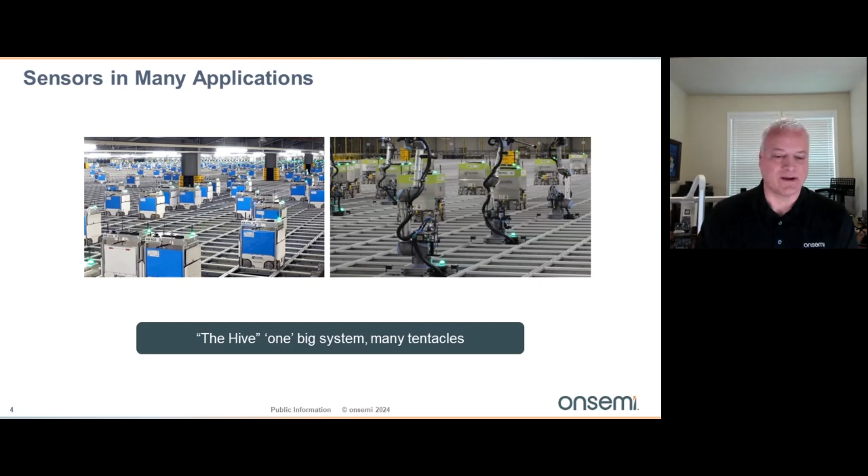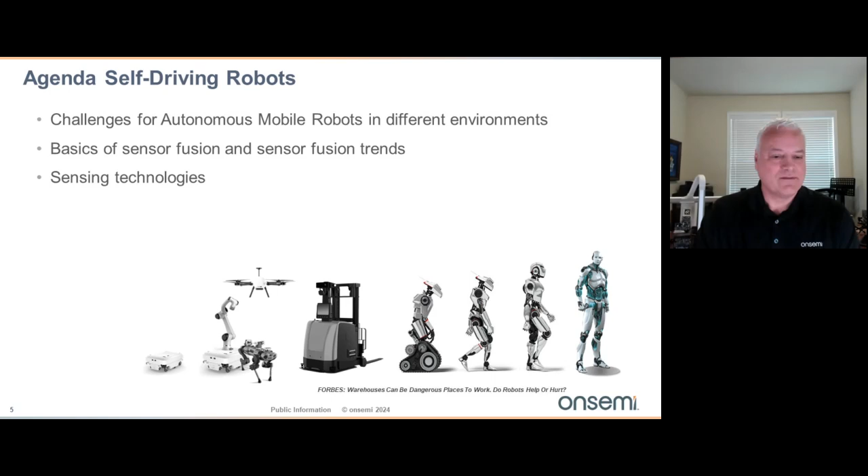So when we eventually create this wonderful humanoid, do I really need any other smart equipment around it? Because companies today already have humanoids drive the car, humanoids drive the not-smart forklift, and also have humanoids do other things. So there's this two-way approach where we have dedicated equipment, dedicated machinery that we're making autonomous, and then this activity to create a general smart humanoid that can take on many of these tasks.

That would lead to probably more standardization, because the location where you can place the sensors would be very similar in all these systems - they would all go to a specific place. So there could definitely be good gains on safety and standards made by going this route.

Of course, there's a lot of social implications as well, and on one level it's also labor replacement. But there's also many examples, like the dog you see here - things people come up with that make you go, do I really want my furry companion walked around by a humanoid? That relationship - he might love the humanoid more than he does you in the end. So that's kind of weird solutions.

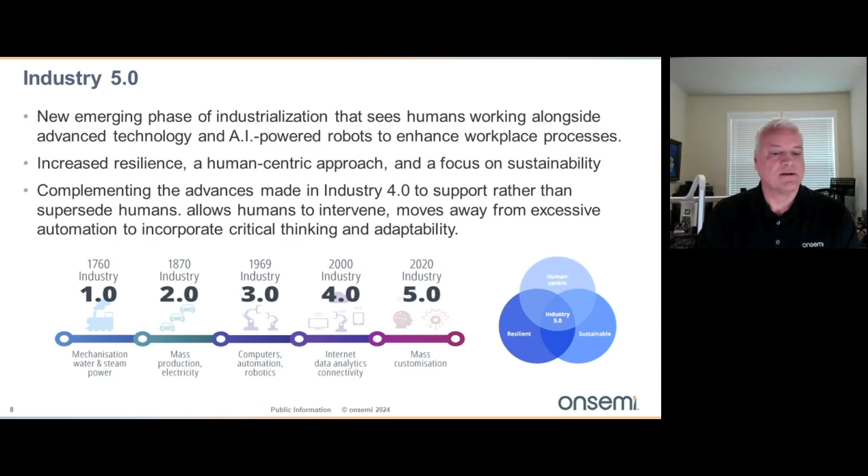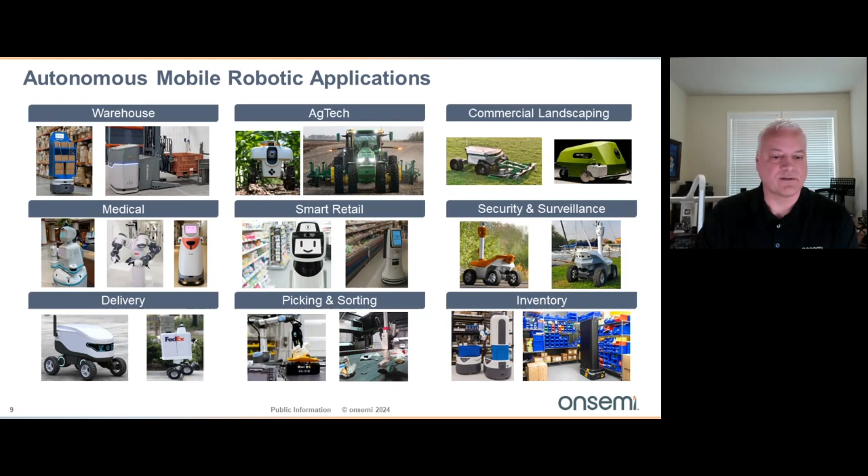It can be all over the place, and so these things are not standardized. Many of them - everybody is making their own solutions. And it's converging though with algorithms and the software side of things, with robot operating systems, etc., that these things get some functions that are inherently required for each of these platforms to move safely around the environment. So we saw our customers make many of these sensor systems as well as robotic solutions.

And we decided it should be fun, as we deliver many of these solutions, to create our own robotic platform. And that's this autonomous mobile robot you see here that we use as a demonstrator at trade shows, and also as a solution integration for different sensors and battery operated power solutions as well. In this webinar, I'm going to focus on the image sensors and LiDAR, as well as ultrasonic, inductive positioning, and Bluetooth solutions. So the sensors more - there's other presentations we have that focus more on the power side of things, and other lighting, etc.

So we started, for many years, delivering sensors to traditional industrial robotics after the robots got out of their cages and were used more in industrial settings. They either have sensors on them to be safe around people, so if people approach they can slow down or stop, or have sensors in the environment that detect people and can slow them down.

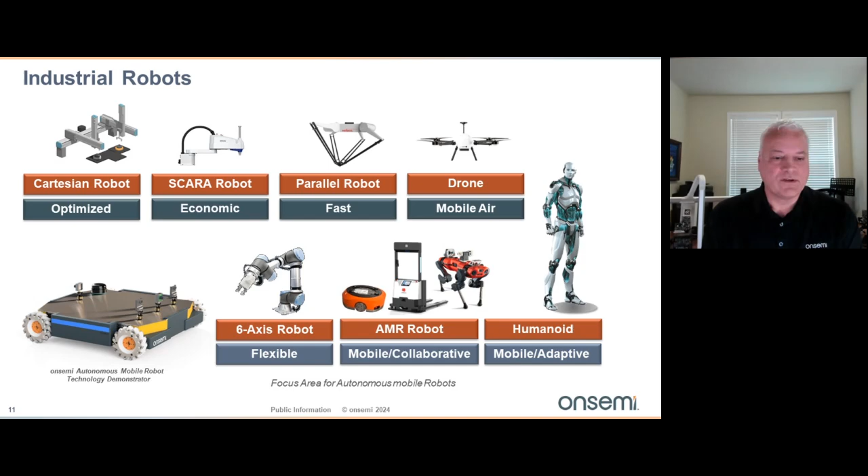This now goes from collaborative solutions to what we call adaptive solutions. And there's our friend again that looms on the right side. So this move from collaborative robotics to adaptive robotics characterizes itself by doing tasks with intrinsic safety and performance without compromise. You see a lot of medical solutions coming, elderly care, very fine motor tasks that these robots can do with their end effectors, and also very generic things like housekeeping chores or operating other machines in general.

One of the things that held robotics back a little bit was, how do you instruct these robots what to do? There were, of course, inroads made with these robotic arms to use waypoints, so you can move the robot and program it that way, so you don't have to actually program something.

But now with the advancements of, of course, large language models, you can instruct it what to do and have it have a really good interaction with these systems to have them do what you want at certain times. They are also more capable of performing tasks that traditional robots were not able to do. You saw every week there's a video with robots dancing and jumping and doing things we couldn't believe they could do before. So that's very interesting and encouraging.

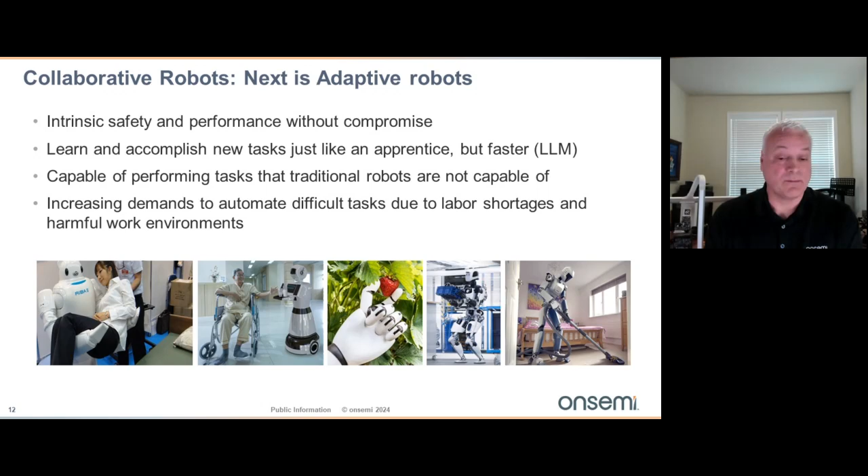And then the increasing demand for automation due to difficult tasks or labor shortage is something that is a continuing path that we're on with all this automation.

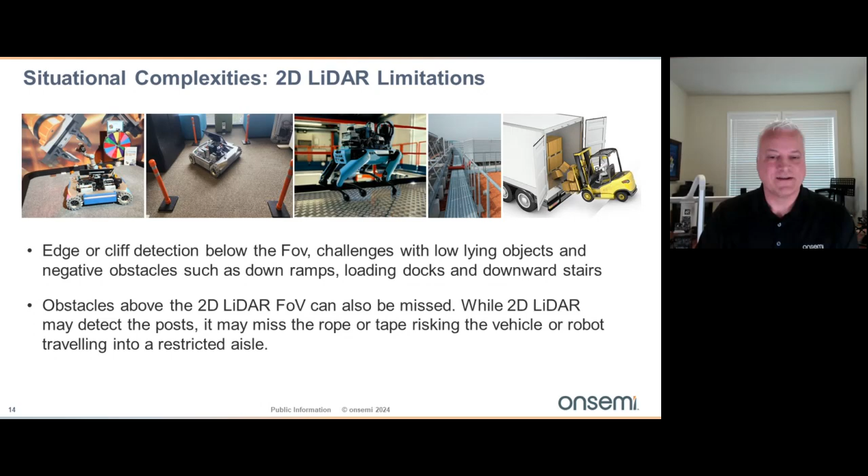Apparently, robotic systems are more challenged with liquids in general. This applies for industrial settings as well, and they need to have special training on that.

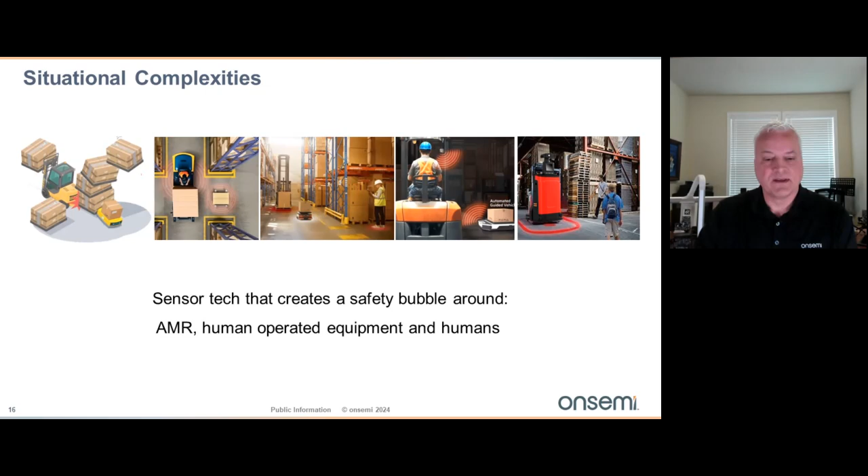So many different things can happen with these systems. The best practice is to control the environment, and that's really good because in an industrial setting we can do that. We don't have kids playing with balls or toys in a warehouse. We don't have a lot of vandalism or deliberate undermining of the robotic systems. There's more control in these settings.

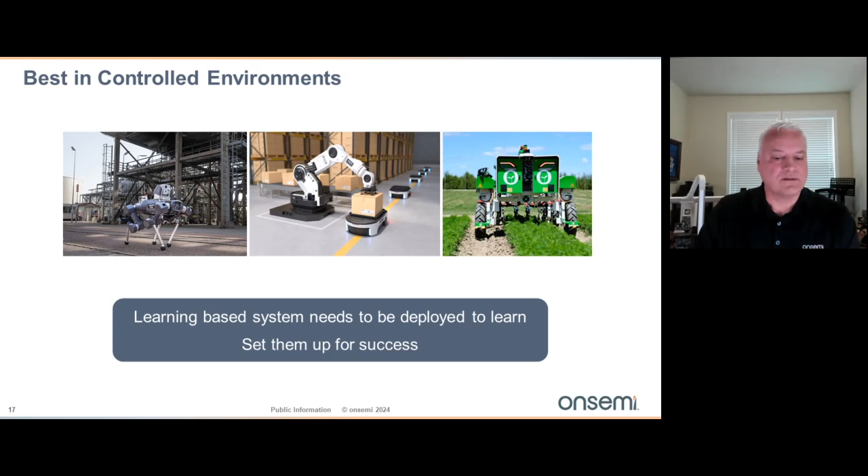Also, if the robot sees something weird, it can actually stop. This is a big issue because with autonomous cars, if you're driving on the freeway or highway and it sees something weird, it can't stop because that would be a hazard. In our environment, it can do that. So we have a good way of letting the systems learn in that space while also staying safe around it.

Secondly, the best thing to do is always simulate your environment. If that security robot with the fountain had driven the same route in a simulation environment, it would have seen that it would drive into water and wouldn't have dropped in. So digital twin simulation environments are very important.

Many years ago, I saw a simulation with a four-legged robot walking around. They spawned 2,000 of these and had them run overnight. In the morning, they downloaded the code onto the physical robot, and it could step up, walk, follow paths, and climb stairs. This is accelerated learning with AI, the equivalent of what they're now doing with the humanoids that are all being announced at the moment.

The good thing, or what would be nice, is to have a standardized certification for something - so you'd say, if you run 1,000 hours in this simulation with, say, 2,000 robots spawned, you can certify your product to be safe in this class of industrial setting, or for last mile delivery, which is another can of worms, where there are sprinkler systems, kids who could deliberately do stuff, etc. So you have to simulate these scenarios.

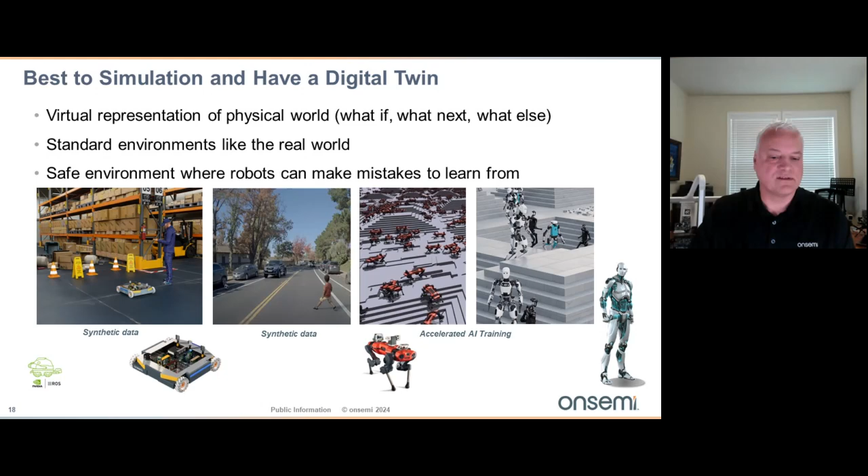So the takeaways from these observations are: control your environment, limit what the robot can encounter, define the safety stops and slow down if that's possible. Make procedures so that if the robot still has an issue, it can safely park or do something. Then, for sensors, if you control the environment, the sensors used to safely drive around don't need to be all on the robot.

They can also be in the building or on other robots, and they can share that information. Simulate your environments - a digital twin with standard certified simulation environments would be nice to have, but if not, then you're the expert of your environment. If you're in the agricultural or medical space, think through these scenarios and create them in wonderful tools like the NVIDIA Omniverse.

And then lastly, you need sensor fusion and sensors in general with really good algorithms that also are redundant and give you the safety for these kind of solutions.

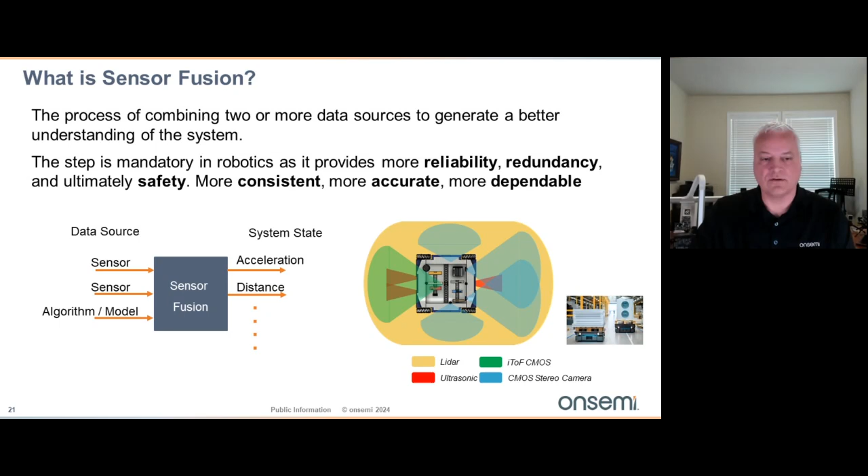We show here our mobile robot with its sensors. This is a sensor demonstration platform, so we're not really putting anything on this to drive around with it. But if you would, you need the sensor as a complement on the other axis as well, to have a 270 degree view on each side, because you cannot look through what you're driving around.

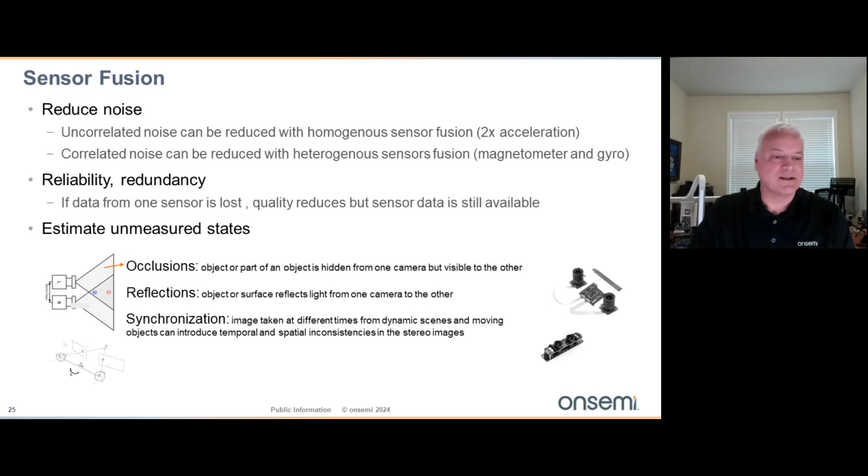With sensor fusion, you can estimate unmeasured data. The big example there is stereo cameras. None of the individual cameras have depth information directly, or they have it hidden, but you need two of them to get angle measurements and then do a depth calculation for those systems.

As mentioned, trends in sensor fusion are really about AI. Everybody's on AI algorithm creation, and there's a lot of research happening. NVIDIA just launched DeepStream 7.0 last month, and they have interesting algorithms where with single cameras you can, even from a head and a partial torso, determine where the feet are of a person in a space.

These are very interesting developments that enhance object detection and classification. There's a lot being done where sensors are cooperated. For instance, the front robot driving sends its sensor data to the back one as well, so it can see ahead or in other places or buildings, where something happens in a space. The robot doesn't have to see this itself—it can get this warning from another wireless method and change its path already.

Another very important thing is environmental perception and adverse conditions—if you have bad weather, sunlight, and those kinds of things, that's an area with a lot happening. And then real-time sensor calibration and robustness of calibration processes for sensors is something actively worked on.

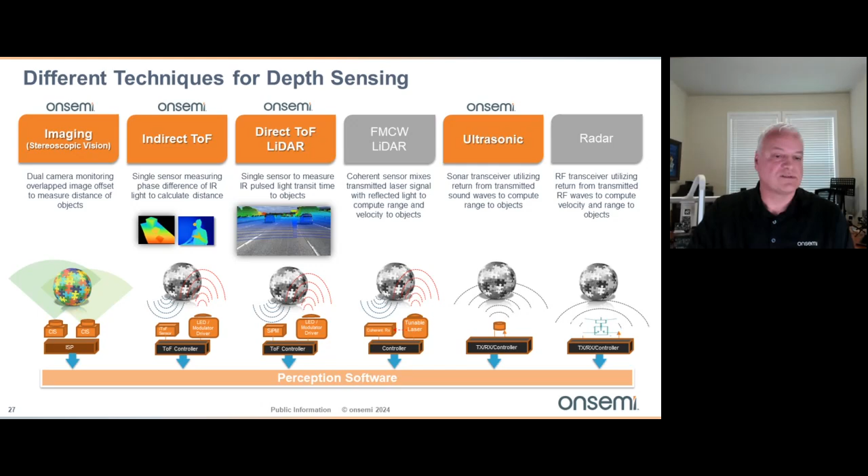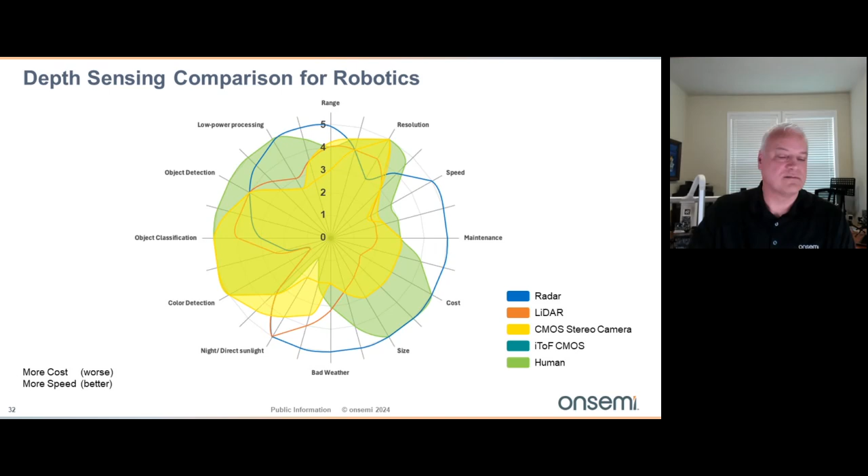I'm overlaying different sensors here, and I won't talk too much about them due to time constraints, but this last one, the worst color I see, is a stereoscopic camera, and you can see customer perception was that they were not so good at night and direct sunlight. This was information we saw some time ago, and we thought we have to do something about it—can we improve night vision and direct sunlight performance, as well as range or speed, which were other areas where perception showed we could correct and make things better.

This perception of dynamic range—in the physical world where you have sunlight directly behind a traffic light, or sunlight coming into your warehouse, or in agricultural settings—there's a lot of dynamic range in the picture, and image sensors could really benefit from a boost in technology to solve these issues. We created several sensors to do that.

With these solutions, you can make the fanciest algorithm you want, but if you don't have any data in there, you can't do anything with it. So sensor quality and sensor features are very important for creating good solutions for self-driving systems.

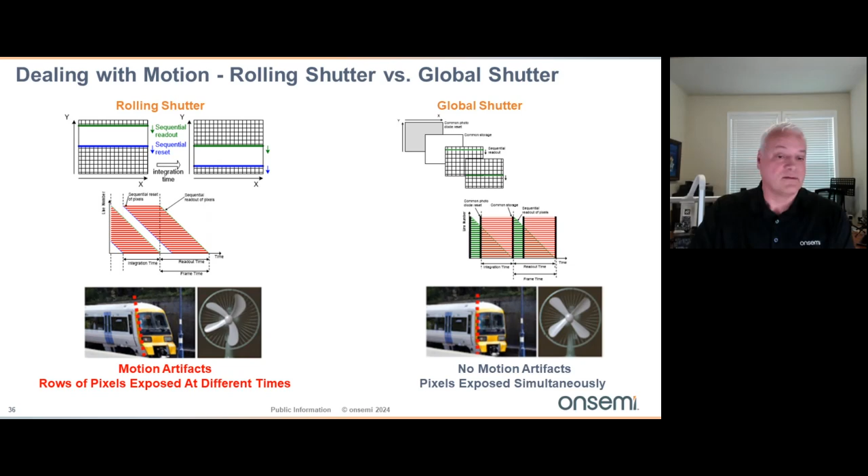Or you might have both of these sensors on your system to handle different use cases.

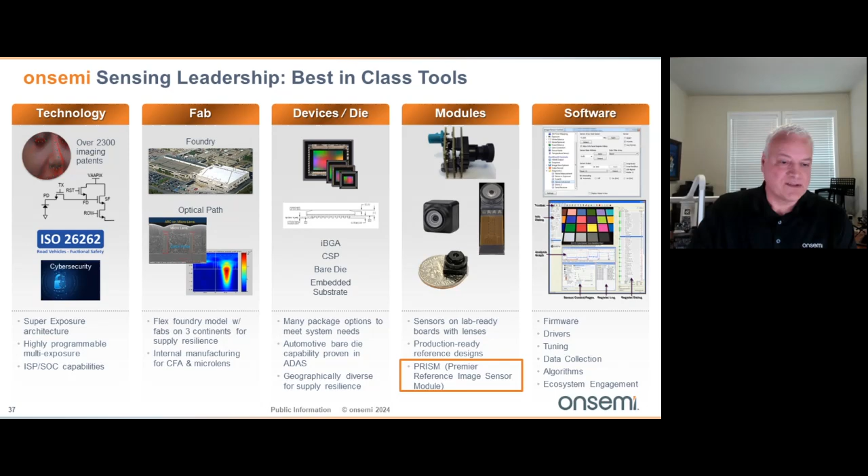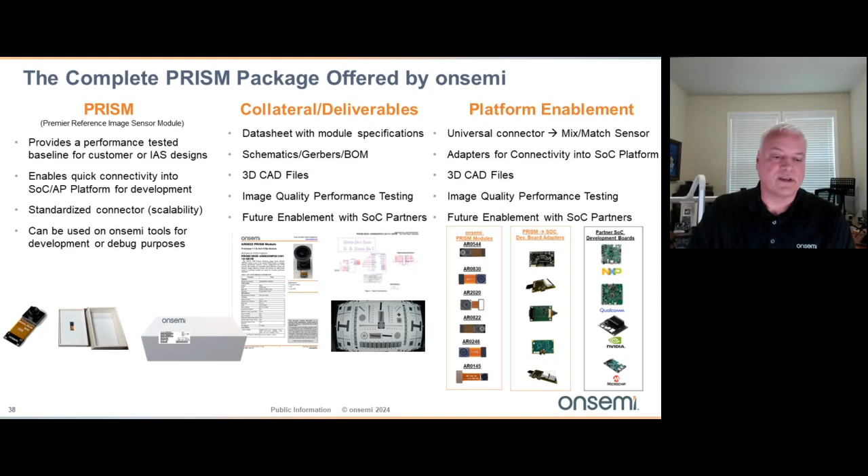So for image sensors, we have this whole collateral from technology to fab to device die, then modules and software. One of the things I want to highlight is this Prism - premier reference image sensor modules that we are creating, seen here in the image. They're very small, but we have adapter boards to the main computer systems out there, like the Jetson Nano and Orin, and other systems, NXP and Qualcomm, to get you going very fast with our image sensors in these solutions used for robotic applications.

Jumping to another light system, LiDAR. We talked already about it. I'm going a little faster because I'm running out of time. But obviously there is the single point LiDAR, the 2D LiDAR, where you get a horizontal 360 view if it turns around, of what's around you.

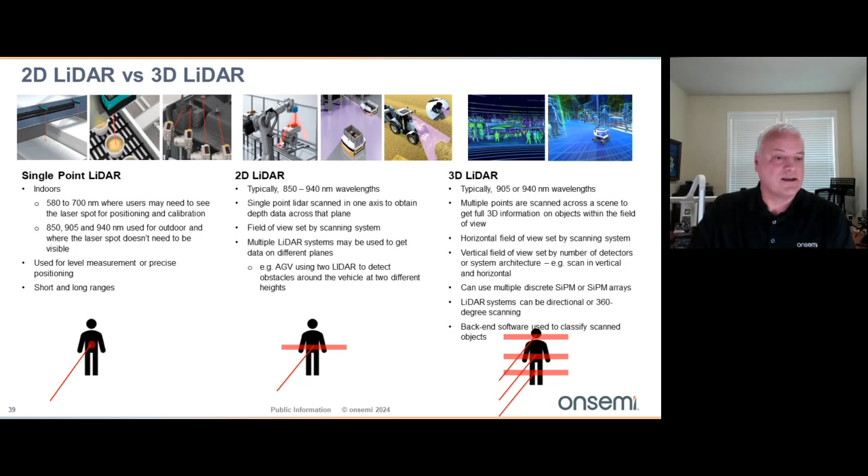But as mentioned, anything below the field of view or above the field of view of that 2D LiDAR, you might not see a cliff or an edge or a rope or anything like that. So you can have multiple 2D LiDARs to solve that issue, or you can also have 3D LiDARs that give you a more complete image of your surroundings, and deal with it that way.

Of course, these work in dark environments - so if you're in an industrial application where the warehouse is dark at night, that's fine because you're carrying your own laser light with you. There's two examples here of products we currently have in the market with our silicon photomultiplier, and I have here an example of that device that's available. There's a development kit that people can use to create a solution for that.

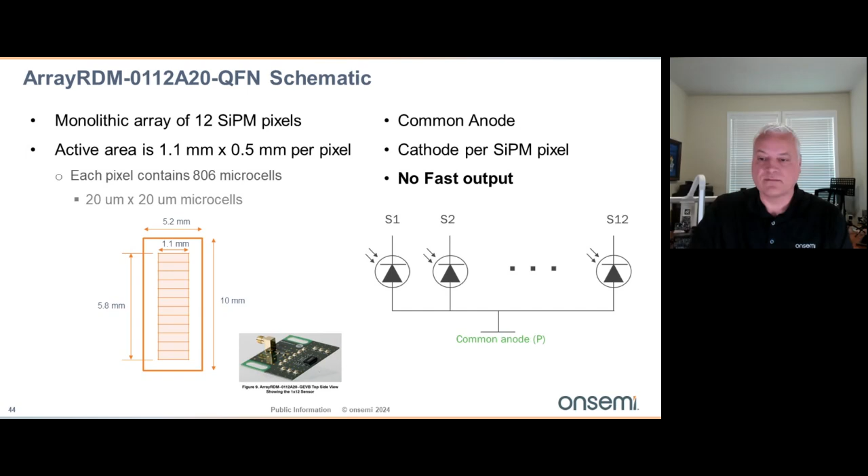Next, so we talked about light. For location or depth sensing, if you want to do location, you can actually define what it means to be able to determine your location. You can also do that with RF, and you can do it with sound.

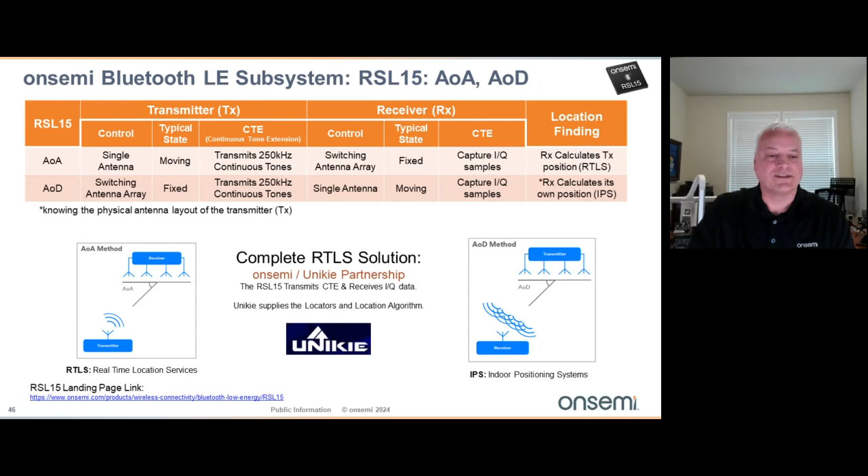So we talked about light. If you do this with RF, we have a Bluetooth Low Energy solution subsystem and a complete product with Unikie that can use angle of arrival and angle of departure for your indoor positioning system or location service. The difference between the two is which one - whether the transmitter is moving or the receiver is moving. That's how you can distinguish these systems and dive more into these solutions. There's a link for that as well.

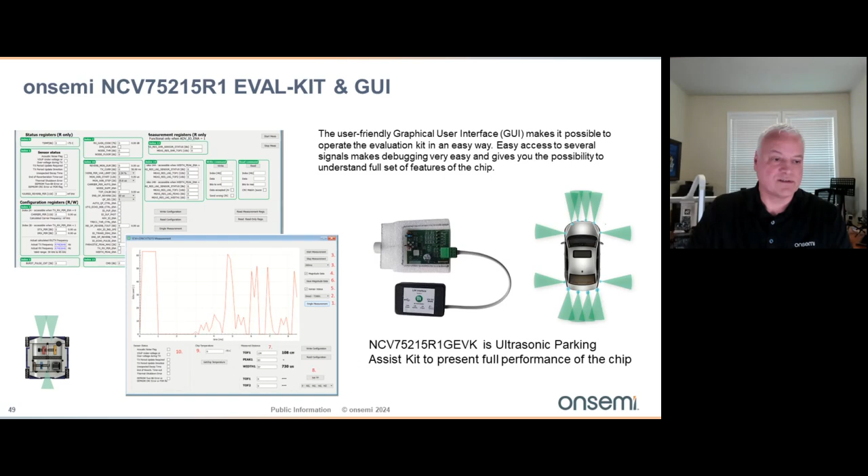And then lastly, ultrasonic solutions, so sound solutions. We have a sensor kit for that, and this comes from our automotive side, but we also have this for our robotic solutions. So using ultrasonic sound for different applications, that's also an option.

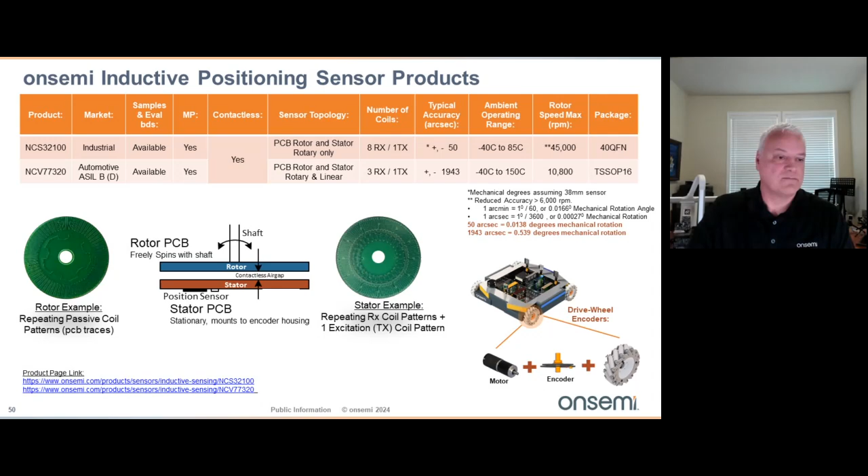With that, it's my last slide. I think if we're on the path of getting better sensors and merging these with better algorithms, we definitely get to a situation where we can have these robotics go out of their controlled environments into more generic environments and be safe around humans and assist us in different tasks.